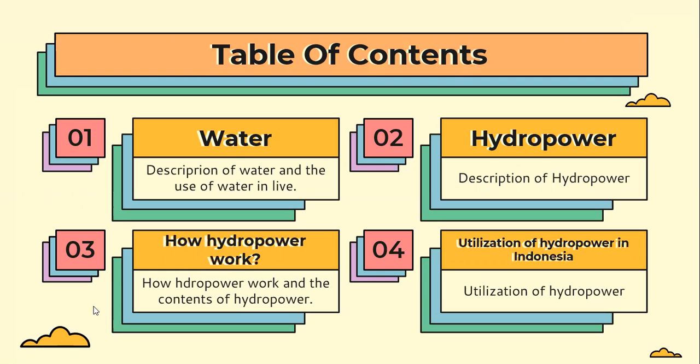The first is water. What is water? Water is an inorganic, transparent, tasteless, odorless, and nearly colorless chemical substance, which is the main constituent of Earth's hydrosphere and the fluid of all known living organisms.

Humans may be able to live for several days without food, but humans will not survive for several days if they do not drink, because the human body is made up of 73% water. One of the inseparable needs of every living thing in this world is water, not only important for humans but also for animals and plants. Without water, there's no life in this world because all living things need water to survive.

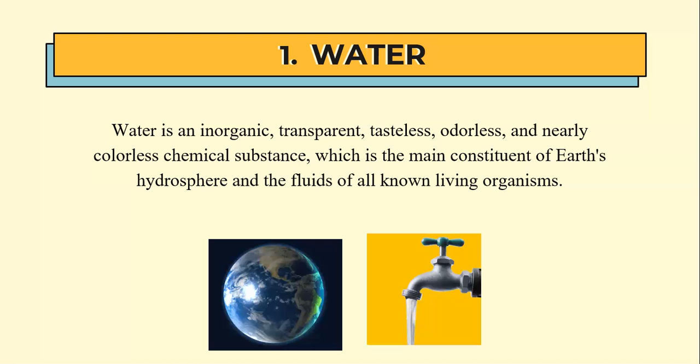The benefits of water are for household purposes like watering, drinking, cooking, washing, for public purposes, commercial purposes, agricultural purposes, and in addition, water can also be converted into energy used for electricity generation and has been widely used in Indonesia, like power plants or hydropower.

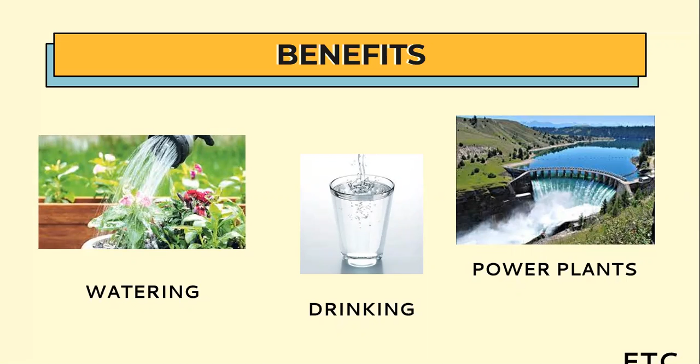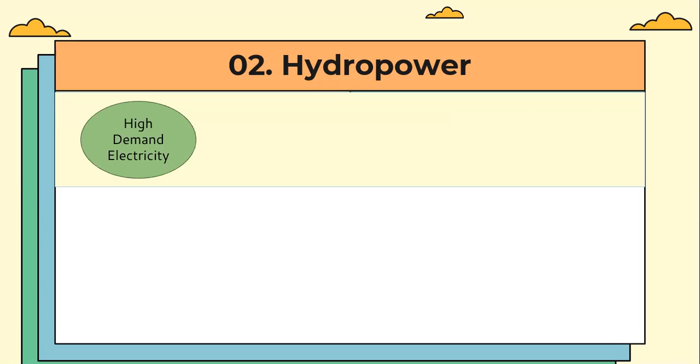Okay, and then we will talk about hydropower. Meeting the growing demands for electricity creates difficult decisions for many countries. And then next, the context for decision making is also changing, particularly in light of the climate change imperative encouraging a move away from greenhouse gas emitting energy sources.

Hydropower is a major technology, harnessing the energy moving from higher to lower elevation. It is using the energy of moving water. The kinetic energy of the flowing water turns the water wheel and is converted into mechanical energy that runs the mill. Hydropower is a system with three parts.

The first one is the electric plant, where the electricity is produced. The second one is a dam that can be opened or closed to control water flow. And the last is a reservoir where the water can be stored. Next.

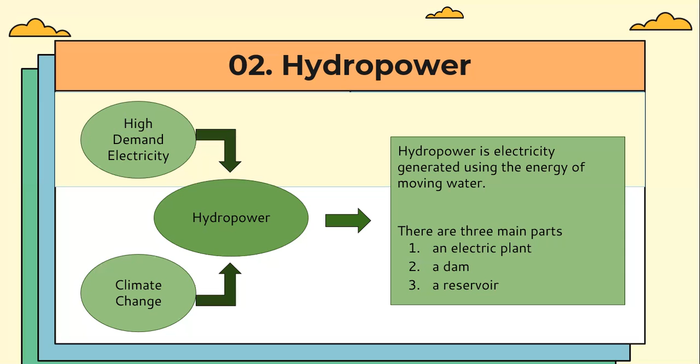And these are the advantages and disadvantages of hydropower. Hydropower is the cheapest way to generate electricity today. That's because once a dam has been built and the equipment installed, the energy source, flowing water, is free. It is a clean fuel source that is renewable and has low greenhouse gas emissions. Hydropower is also readily available.

Engineers can control the flow of water through the turbine to produce electricity on demand. In addition, the reservoir may offer recreational opportunities such as swimming and boating. But hydropower also has a negative side.

Hydropower may destroy or disrupt wildlife. Some fish, like salmon, may be prevented from swimming upstream to spawn, as the presence of hydropower dams changes their migration patterns and hurts fish populations. Hydropower also can cause low dissolved oxygen levels in water, which is harmful to river habitats. Next.

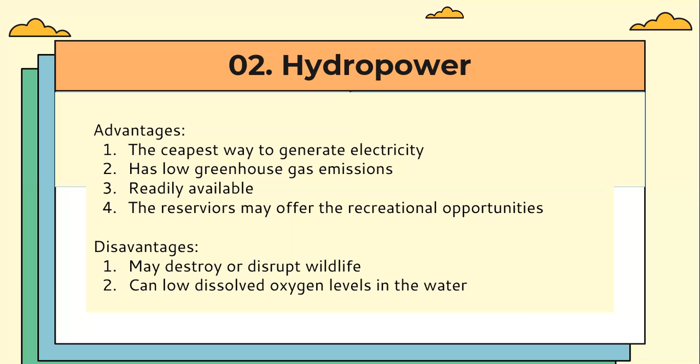Hydropower is a resource of electricity generation that uses the potential and kinetic energy from water to produce electrical energy. So we can say that running hydropower is basically converting water energy into electrical energy. Water's potential means that it can be used to drive a turbine; the water in the dam will go down into the hole to turn the turbine.

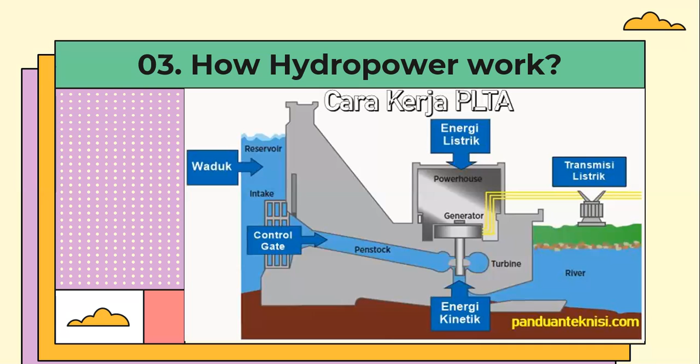Next is the utilization of hydropower in Indonesia. Hydroelectric power in Indonesia plays an important role in household electricity needs, especially in rural areas, by using turbines and generators, as well as the transmission line to flow electricity to homes or industries. As a maritime country, it is appropriate to use water as an energy source for many purposes. Here are some of the uses of hydropower in Indonesia.

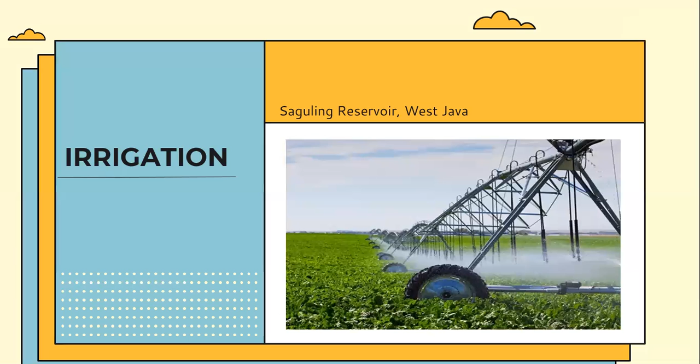Third is as a tourist spot and geopark. An example is the Sigura-Gura hydropower in Samosir, North Sumatra.

Then there is the Jatiluhur Reservoir, located in Purwakarta, West Java. Apart from being used as a tourism site, the Jatiluhur Reservoir is also the most important part of meeting electricity needs in Priangan Land and Jabodetabek. In addition, it is also used as a means of irrigation, drinking water supply, and flood control.

The last one is a source of transportation. An example is Musi Hydropower in Bengkulu. Apart from being used as a source of transportation, Musi Hydropower is also a run-of-river type power plant.

The following are some of the hydropower plants in Indonesia.

The picture below shows the five largest hydropower plants in Indonesia. Number one is the Cirata Reservoir, West Java. Cirata Reservoir is currently the largest hydropower plant in Indonesia, with a power capacity of up to 1,008 megawatts and an average electrical energy capacity of 1,428 gigawatt hours.

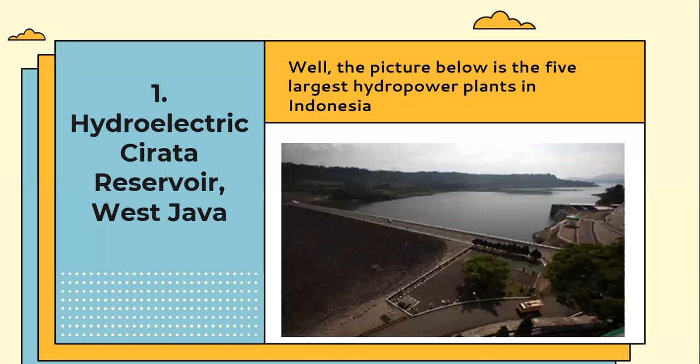Number two, hydropower reservoir Saguling, West Java. Saguling hydropower is an artificial reservoir in West Bandung Regency with a pool area of 5,600 hectares and a water discharge of 817.5 million cubic meters. The Saguling Reservoir is currently able to meet electricity demand with a capacity of 700 megawatts, which can be increased to 1,400 megawatts.

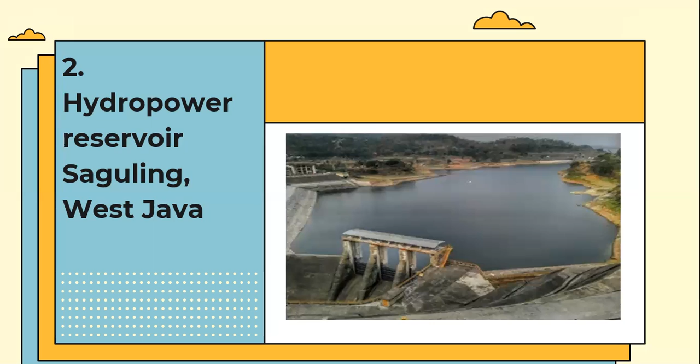Number three, hydropower Sulewana, Poso, Central Sulawesi. Hydropower Sulewana is already in the third phase of construction, with a capacity of up to 400 megawatts. This hydropower plant is located near the Poso River and will be completed in 2022.

Number four, hydropower Sigura-Gura, Samosir, North Sumatra. Apart from being used as a geopark, Lake Toba is also used as a hydropower plant in Indonesia. This is because hydropower Sigura-Gura is a power plant owned by PT Indonesia Asahan Aluminium.

The last, number five, hydropower Musi, Bengkulu. Located in the upper reaches of the river, Musi Hydroelectric Power Plant is a run-of-river type power plant located 400 meters above sea level. Musi Hydropower is capable of generating electrical energy of 1,150 gigawatt hours per year, with the ability to supply electricity between 150 kV to 175 kV.